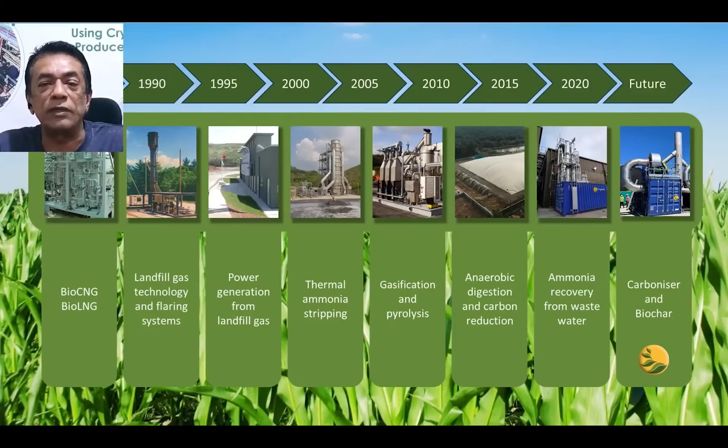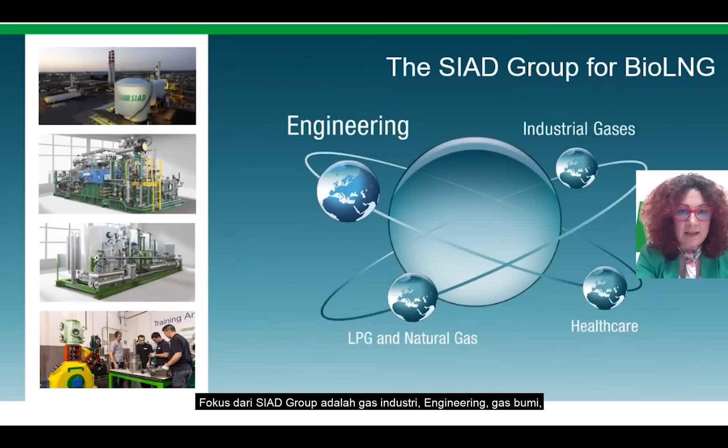And now let me introduce our company. SIAD Group has been active for almost 100 years in Europe and all over the world, and it's one of the most important industrial chemical gas companies in Italy. The focus of SIAD Group is industrial gases, engineering, LPG, natural gas, and healthcare. In 2023, last year, we reached 1 billion turnover with more than 2,000 employees.

And 1/4 of the turnover was covered by the engineering group.

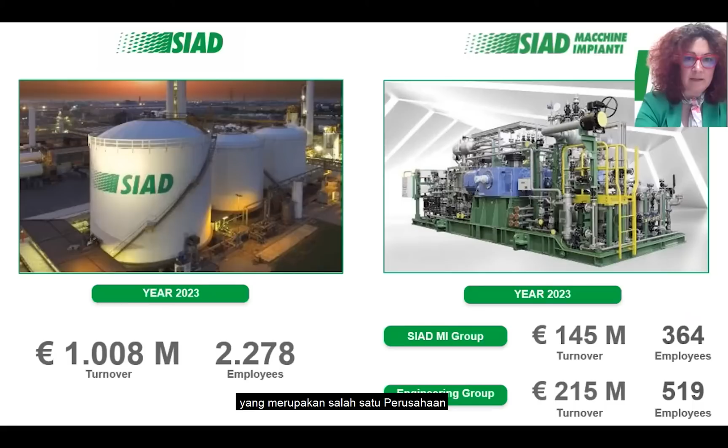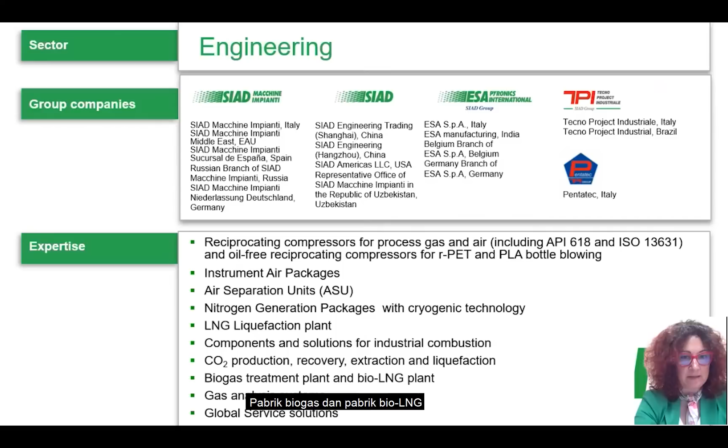SIAD Macchine Impianti Group, the engineering company of SIAD Group, is one of the main engineering companies covering the engineering business. The main products of SIAD Macchine Impianti are those indicated here, among them reciprocating compressors, instrument air packages, separation units, nitrogen generation packages with cryogenic technology, LNG liquefaction plants, CO2 production, recovery, extraction and liquefaction, biogas treatment plants and bio-LNG plants, and global service solutions for all the indicated products.

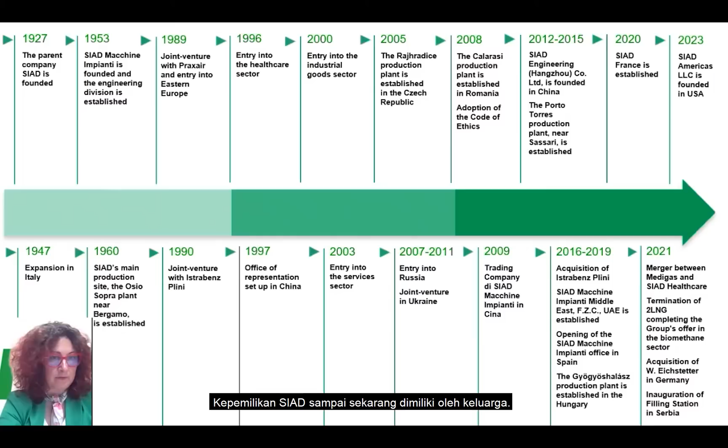Let me introduce to you some key facts important for the SIAD foundation and development. In 1927, the parent group SIAD was founded by the family. The ownership of SIAD is up to now of the family. In 1953, SIAD Macchine Impianti, the engineering company, was founded. In 1989, there was a very important joint venture with the American group Praxair, up to 2018 when Praxair merged with Linde.

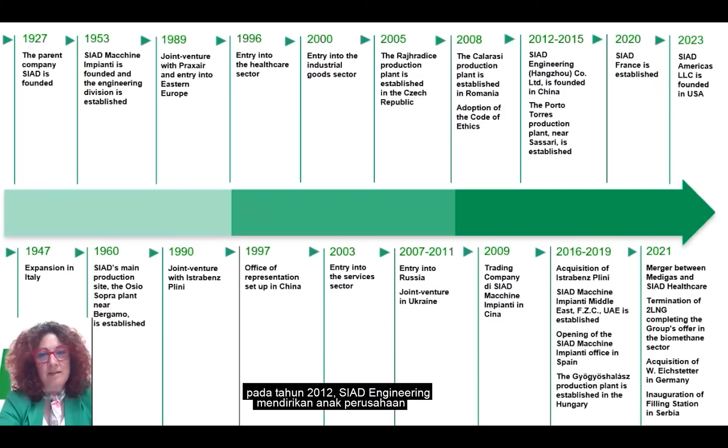In 2012, SIAD Engineering Hangzhou, our Chinese subsidiary, was founded in Hangzhou in China, and in 2023, last year, SIAD Americas LLC was founded in The Woodlands, Houston area, for approaching the American market. Our location: the headquarters is in Bergamo, close to Milan.

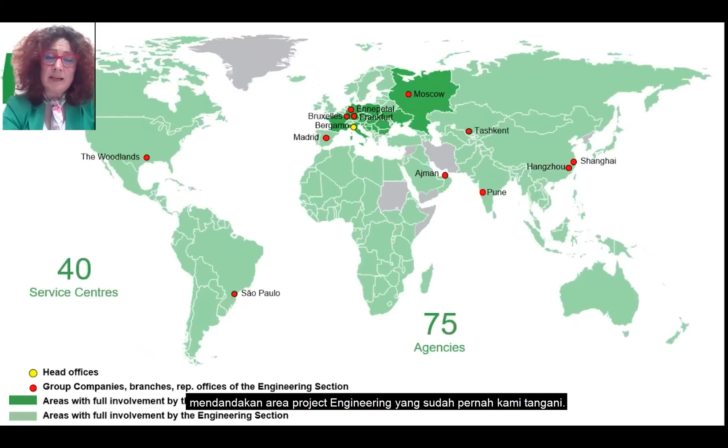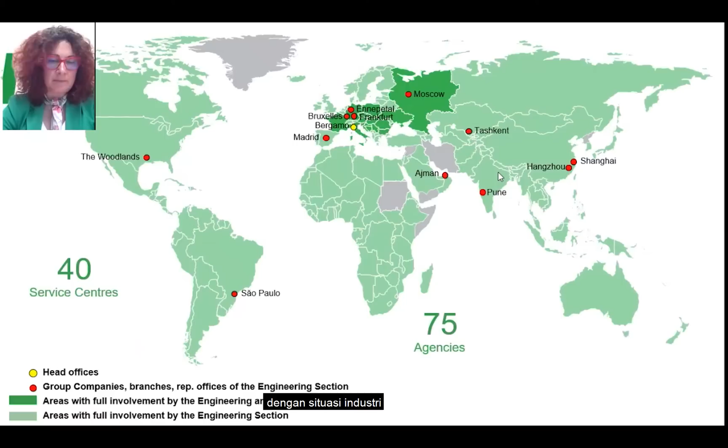And here an overview of our presence in the world. In dark green, you can see the presence of gas operations, so industrial gases, and in light green, the countries covered by the engineering, so all the products sold all over the world. With industrial gases, engineering, and our subsidiaries or branches, we can cover all the world. Here you can see, for example, our subsidiary in Hangzhou in China, our branch in Pune, our service center in Ajman, and here our headquarters in Bergamo.

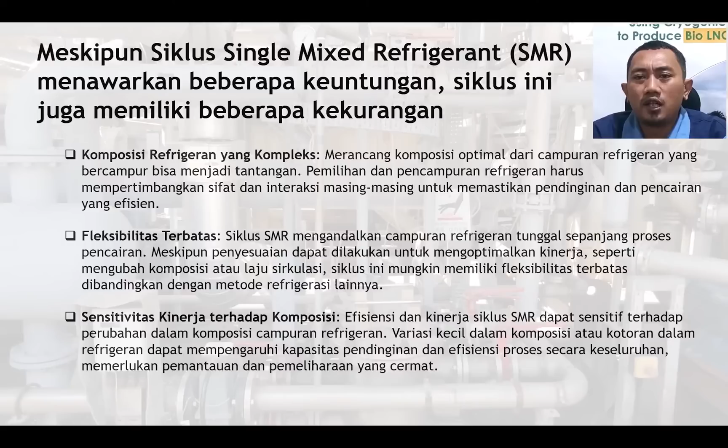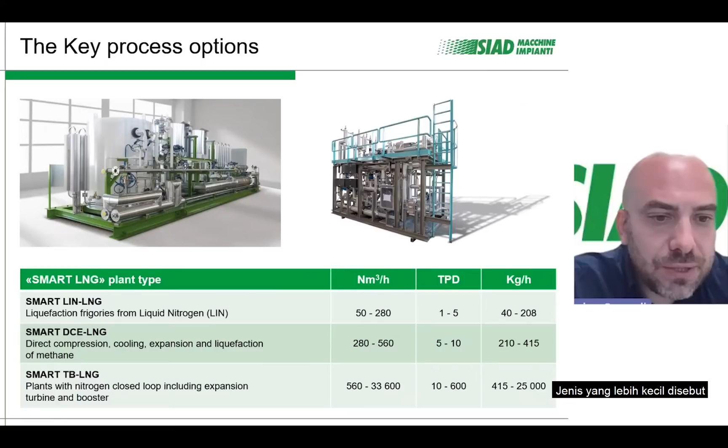SIAD Macchine Impianti can produce typically three sizes of different liquefaction plants. The smallest size is called the Smart LIN-LNG. The tonnage goes from 1 to 5 tons per day. The middle size is called Smart DCE LNG, which is based on the direct compression and expansion cycle. And the last size, from 10 tons per day up to 600, is the Smart TB LNG, based on the Brayton-Joule cycle.

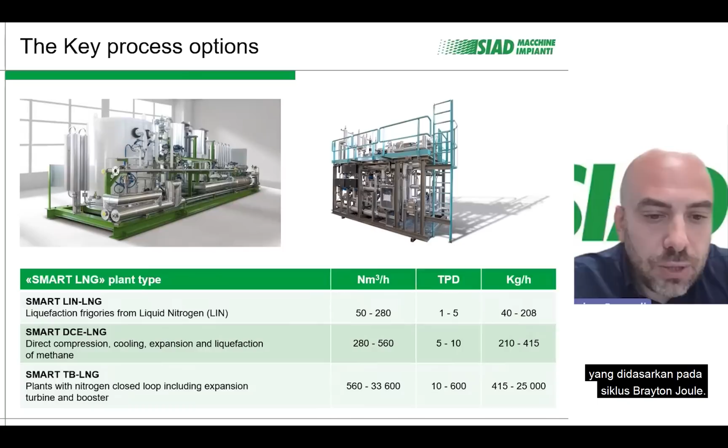The reason why the company chose to move in this direction, to the LNG market, is driven by environmental purposes. The aim is to reduce CO2 emissions in the atmosphere. This can be done by improving the market of LNG, in particular for heavy road vehicles. LNG finds great application in industrial and civil applications, in particular in remote areas and small towns. It is used as fuel in ships, trains, and airplanes, and for heavy road vehicles like freight trucks and buses. It can also be used for peak shaving in energy demand.

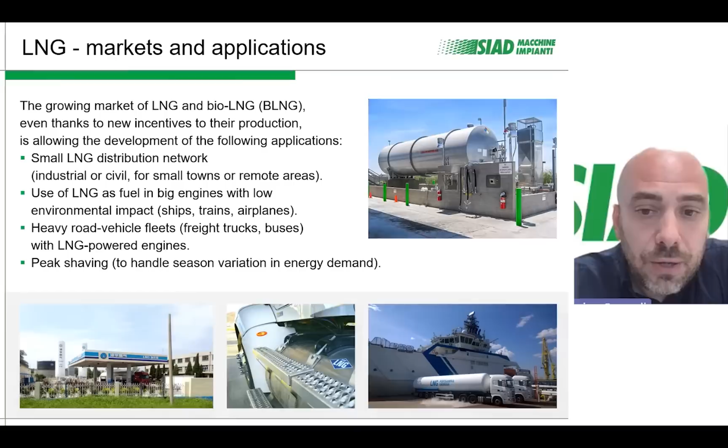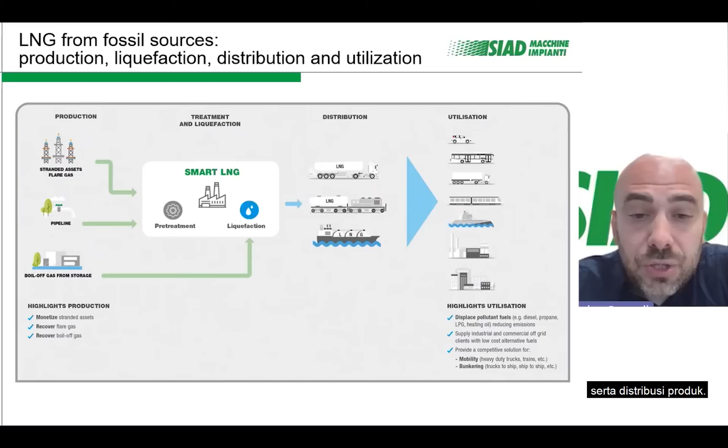Normally, SIAD Macchine Impianti can produce pretreatment and liquefaction plants where the feed gas comes from flare gases, from the pipeline, from boil-off gas storage, or biogas. SIAD Macchine Impianti can take charge of the pretreatment, the liquefaction of the feed gas, and all the utility services necessary to run this kind of plant, like instrument air, nitrogen generation, steam generation, and nitrogen supply. The distribution of the liquid product can be done through trucks or vessels.

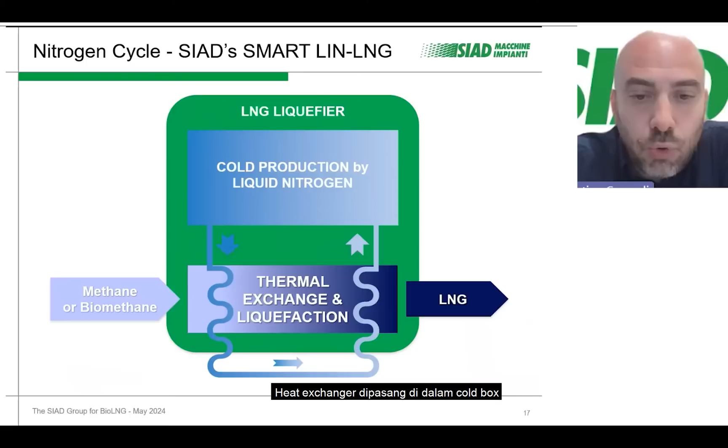The Smart LIN-LNG technology is based on nitrogen evaporation from a liquid nitrogen storage tank. The specific consumption is very, very low in terms of electric consumption. The principle is very simple: using liquid nitrogen at a cryogenic temperature, it liquefies the feed gas inside plate fin heat exchangers. The heat exchanger is installed inside a cold box in order to increase the thermal efficiency.

The typical layout of this technology is very simple. Everything is skid based and skid mounted. So we have the CO2 adsorption unit and the liquefaction plant, everything installed on one single package. Normally upstream of this package, when the CO2 content is over 5000 ppm, it is necessary to install an upgrading system with amine, or for this kind of site, normally membrane technology. Downstream of this package, a storage tank with the truck filling pump is installed.

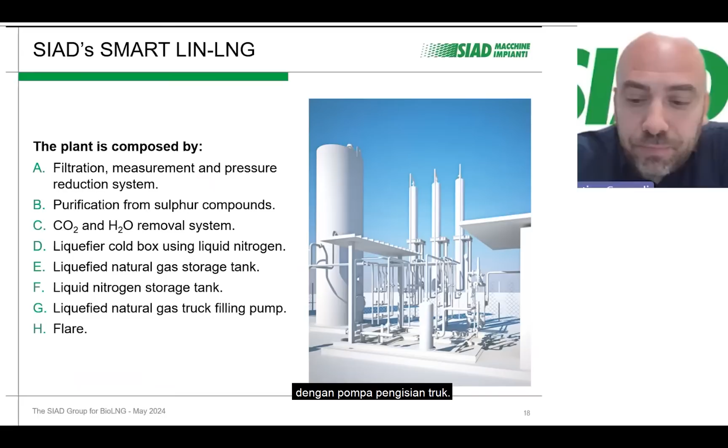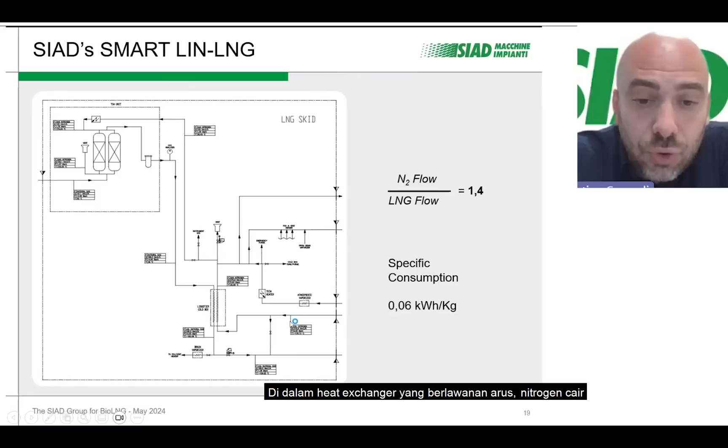The process flow diagram, as we can see, is very, very simple. Everything you see on this PFD is installed on the same carbon steel base plate. So we have the TSA technology, which removes the CO2 content from the feed gas, from the maximum of 5000 ppm down to 50 ppm, in order to avoid freezing phenomena inside the heat exchanger. Inside the heat exchanger, countercurrent, the liquid nitrogen cools down the feed gas in order to produce the LNG.

The vaporized nitrogen is used as a regeneration gas inside the TSA. The specific consumption in terms of electric consumption is very, very low, because the only two electric utilities are related to the heater for the nitrogen vaporization and the regeneration heater in order to heat up the regeneration gas, again nitrogen.

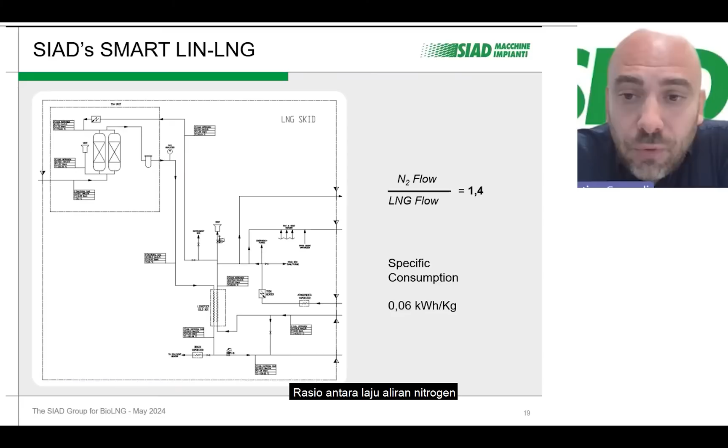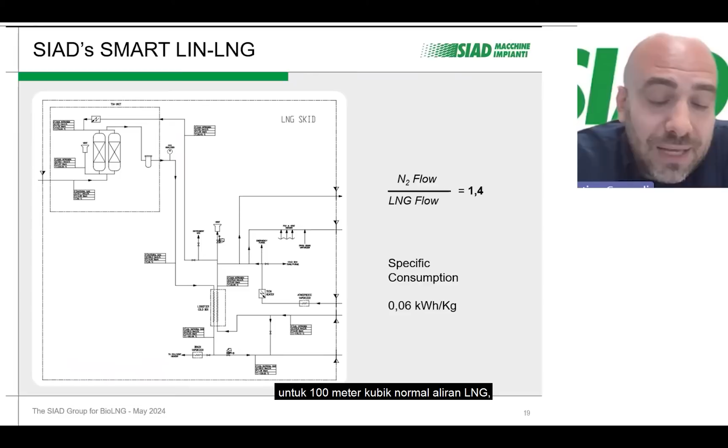The ratio between the nitrogen flow rate and the LNG flow rate is from 1.2 up to 1.4. So we can say that for 100 normal cubic meters of LNG flow, we need 140 normal cubic meters of liquid nitrogen. As we can see from these pictures, everything is installed on one single package for very quick commissioning activities.

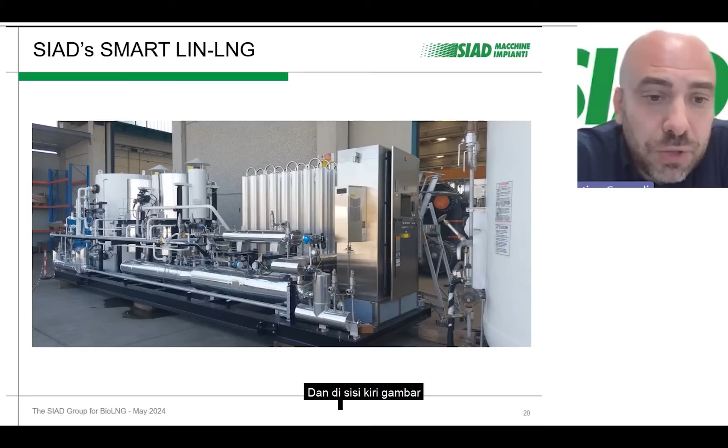We can see on the right of the pictures the HMI system. Then we can see the atmospheric vaporizer for nitrogen vaporization. Then there are the 2 TSA pressure vessel beds, and on the left side of the pictures we can see the cold box with the heat exchangers inside.

My colleague Gennaro: within the SIAD Macchine Impianti LNG technology portfolio, there is also this so-called Joule-Thomson expansion cycle, which is actually an addition to the Smart LIN-LNG that we have seen previously, which basically uses the liquid nitrogen as the refrigerant fluid in order to cool down and liquefy the natural gas from different streams, in this case biomethane.

So basically, the Joule-Thomson expansion cycle, which is also known as the Linde cycle, is based on 3 different steps: compression, cooling, and expansion into a lamination valve, also known as the Joule-Thomson effect. In this case, the methane or biomethane stream itself works as the refrigerant fluid and actually allows reducing the electrical consumption, and there is no need for an external refrigerant fluid, for example, mixed refrigerant.

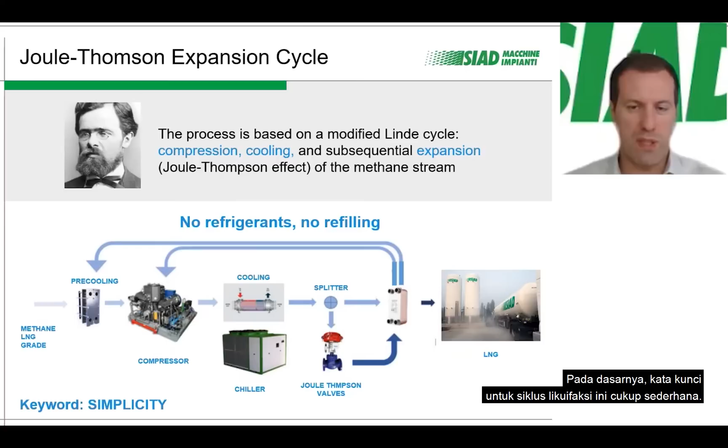Here in the bottom of the slide, we see what this liquefaction technology stands for. So we have as feed gas methane or biomethane, of course, that must be very pure in order to be liquefied. Pre-cooling, compressors, chiller, and Joule-Thomson valve, and of course, at the end of the stream, we have the storage of the LNG. Basically, the keyword for this liquefaction cycle is simplicity.

The SIAD Smart JT LNG technology basically stands for a capacity range between 5 and 15 tons per day through a single module, with a turndown between 60 and 100%, and a consumption depending on the gas composition and pressure, but usually in the range of 0.55 to 0.7 kilowatt hour per kilogram of LNG produced. And the standard output is 3 bar gauge and a temperature of almost -150 degrees Celsius.

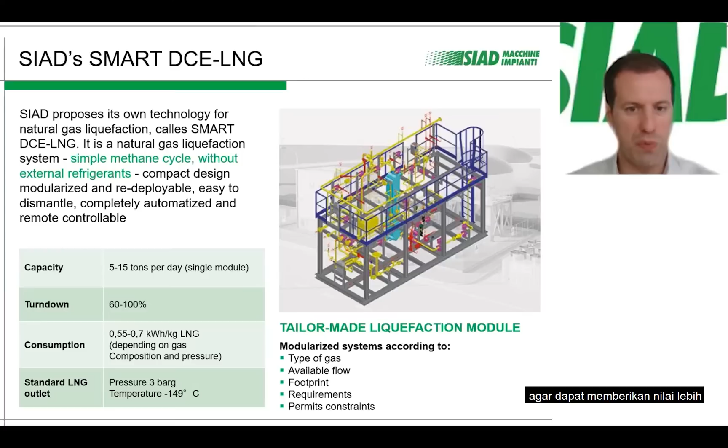There are, of course, several benefits that this kind of technology can provide to our customers, especially when it comes to providing a liquefaction module according to the type of gases, the available flow, footprint requirements, and permit constraints. Those are basically all the topics that we can easily address in order to provide our customers better value for their own customers' needs.

In these slides, we have basically summarized the key benefits when it comes to Linde cycle liquefaction technology. So basically, SIAD Smart JT LNG plants are very easy because there is no cooling fluid for the cryogenics, and they are basically composed of very well-known and simple equipment: compressors, exchangers, and valves.

It's adjustable because the LNG output can be easily adjusted according to the usage need. It's flexible because the turndown is between 60 and 100% and it can accept different inlet gas compositions. Of course, in all those cases, the gas must be as pure as possible. Available because the plant can run more than 8,500 hours a year without any stops of operation.

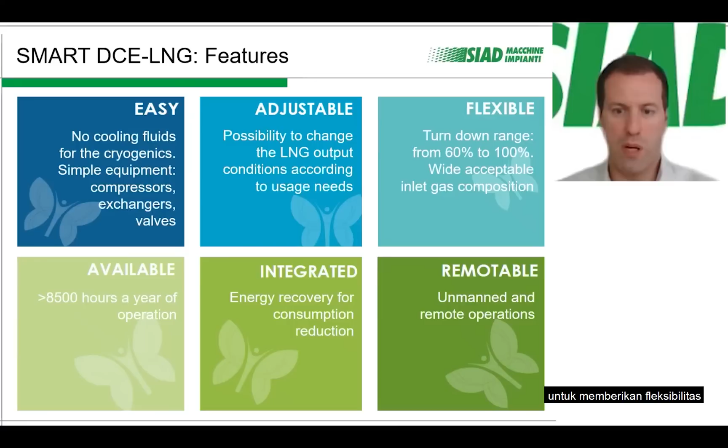Integrated because our plants are designed to recover energy in order to reduce consumption, and remotable because all our plants are unmanned and suitable for remote operation. Also, all the plants are deployable. That means that we can quite easily transfer a liquefaction module from one site to another in order to provide flexibility for our customers' needs.

If we want to make a comparison between the technologies, here we can compare the Smart LIN, Smart DCE, the Linde cycle, and the Stirling cycle, and we can make a quick analysis in terms of capex and specific consumption.

As we can see, in the Smart LIN technology, SIAD has a very, very low consumption because the main consumption is the nitrogen consumption. The only electrical consumption, let me say, is related to the steam, to the vaporizers, to the electrical vaporizers. In the Smart DCE, the consumption is related to the machine, to the reciprocating machine that compresses the feed gas.

Then we have the Linde cycle, which is absolutely similar to our Smart DCE cycle. And in the end, we have the Stirling process. As we can see, the Stirling process has a very high specific consumption compared to the Smart DCE and the Linde cycle. And when we say very high, we mean plus 35% in terms of kilowatt-hour per kilogram.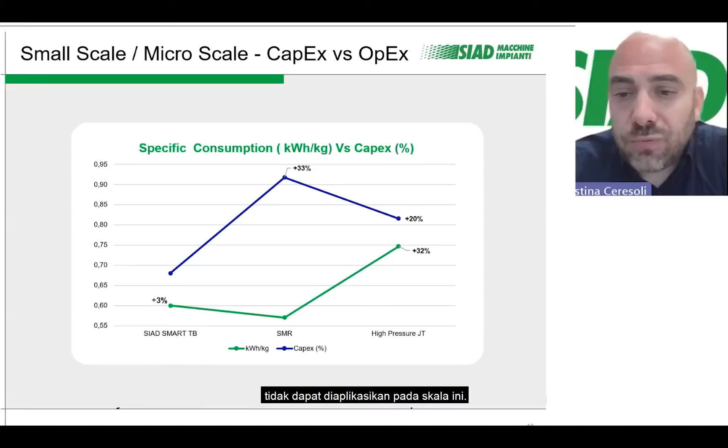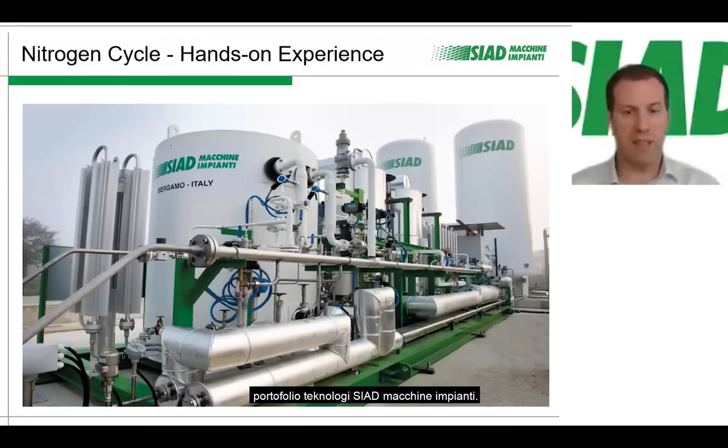In this section of the webinar, we are pleased to introduce you to some references of ours belonging to the SIAD Macchine Impianti technology portfolio. I will start with the nitrogen cycle liquefaction technology, where basically the liquid nitrogen acts as a refrigerant fluid in order to give the frigories to the natural gas stream, I mean biomethane, in order to cool down the biomethane and finally get the LNG.

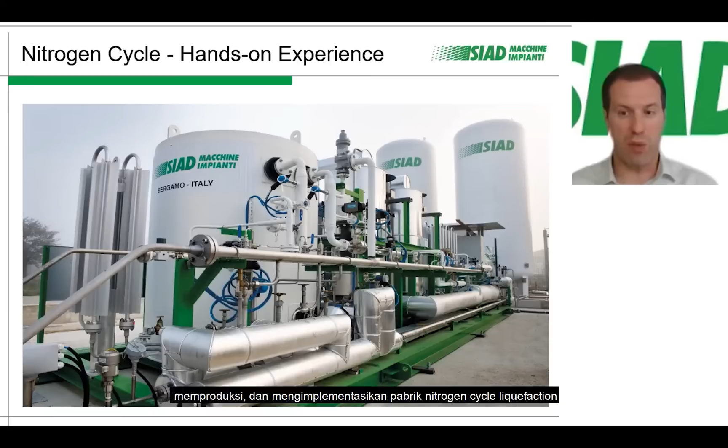The video that I'm about to show you basically represents references that we achieved in the north of Italy, where we have basically designed, developed, manufactured and deployed a nitrogen cycle liquefaction plant in a modular way. Please enjoy the video.

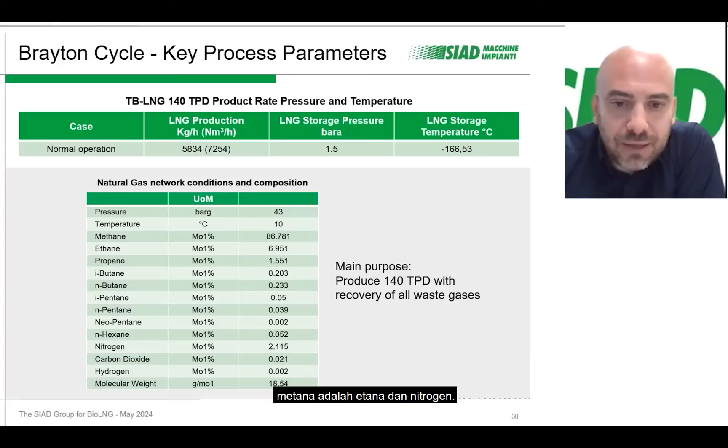The case study presented in this slide refers to an LNG liquefaction plant from grid installed in Northern Europe. In this case, the size of the plant is 140 tons of LNG per day. The LNG storage pressure is 1.5 bar absolute at minus 166 Celsius degrees. The composition of the feed gas is shown in this slide, and as you can see, the highest components, except methane, are ethane and nitrogen.

The key equipment for the natural gas circuit in this kind of plant is the filtration, measurement, and pressure reduction system, purification from sulfur compounds, CO2 and water removal package, liquefier cold box, the storage tank, the truck filling pump, and filling station. In addition, we installed the hot flare, used only for maintenance purposes, the cold flare, which is an atmospheric vent used only for emergency purposes, the regenerative thermal oxidizer, which is necessary to burn at high temperature the heavy

hydrocarbons present in the feed gas, the regeneration gas compressor, which takes the regeneration gas in the amine cycle, which is a booster upstream the pretreatment package, and the BOG compressor, which takes the BOG coming from the LNG storage tank and the truck loading bay, which is processed again inside the liquefaction process.

In this particular case, we also supplied the instrument air generation package and the demi-water generation package, necessary to give demineralized water to the steam boiler package, because the steam in this case is necessary for the stripping of the amine. In addition, we have the recycle nitrogen compressor, the turbo expander, warm and cold side, the liquid nitrogen storage tank, the nitrogen air cooler, the complete closed water loop circuit, and the analyzing system.

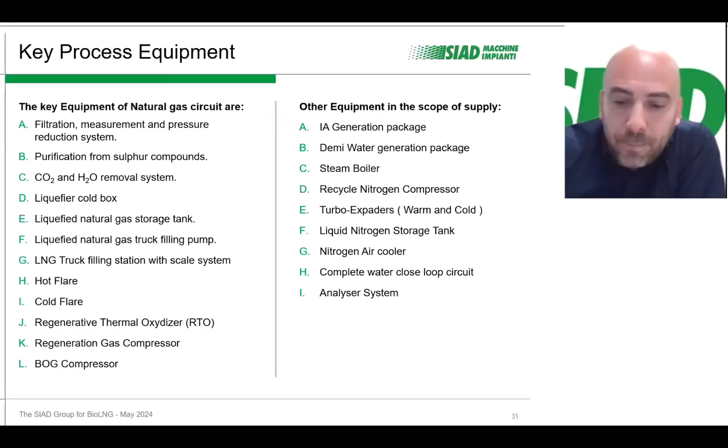The specific consumption of this site is 0.53 kilowatt hour per kilogram. We can see that the recycled compressor consumption is 3 megawatt. The turbo expander is 10 kilowatt because it's just related to the oil pump, and the CO2 and water removal system is 72 kilowatt, which is related to the electric heater on the process.

In particular, we have a very low nitrogen consumption, just 200 normal cubic meter for the purging of the sealing of the machine. The only water consumption we have is due to the demi-water package, which is 0.5 cubic meter per hour, and the instrument air production is 200 normal cubic meter.

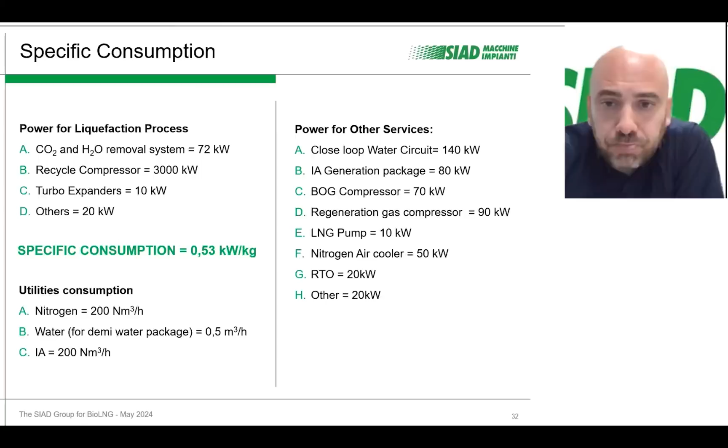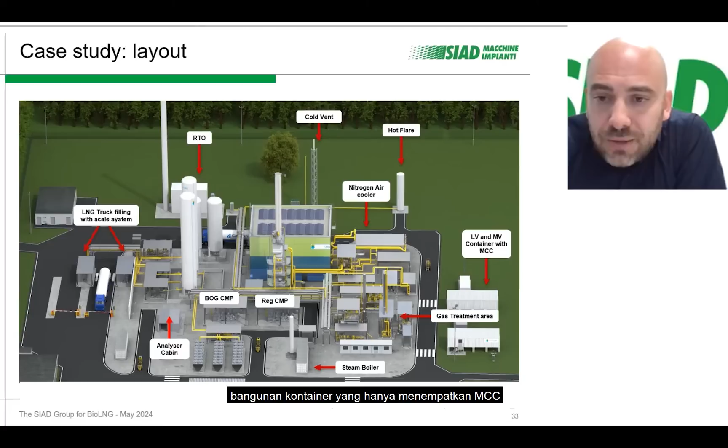The layout of this plant is this one. As we can see on the right side of the area, we can see the two buildings, two containers, where are located the MCC and the low voltage panels. Just beside this area, we have the pre-treatment area with the two high columns.

We can see the CO2 absorption column and the amine stripping column. Just in the north, we can see the nitrogen air cooler, and in the building is installed the warm and cold turbo expander and the recycled compressor. In particular, on the top of the pictures, we can see the hot flare, the cold vent, and the thermal oxidizer.

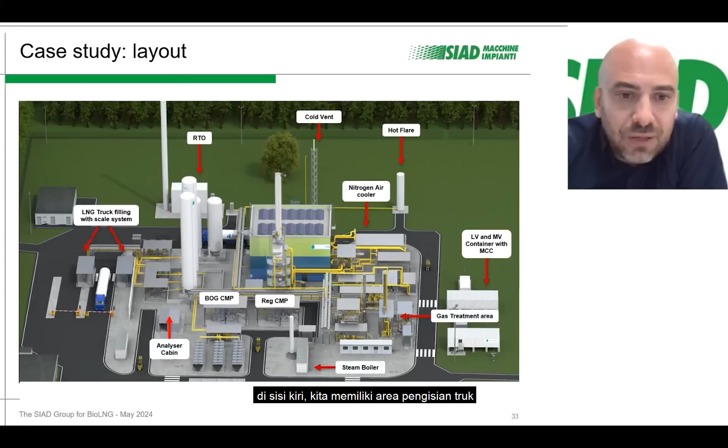In the center of the pictures, we can see under two shelters the BOG compressor and the regeneration gas compressor. On the left side, we can appreciate the two vertical storage tanks. Then we have the analyzer cabin, and on the left side, we have the truck loading bay with the scale system and the related weigh bridge.

Here there is a snapshot of the cold box and the LNG storage tank. In this case, the cold box is 35 meters high, and the tank is more or less 25 meters. As we can see, we have all the necessary ladders and platforms in order to carry out all the necessary maintenance activities on the cold box.

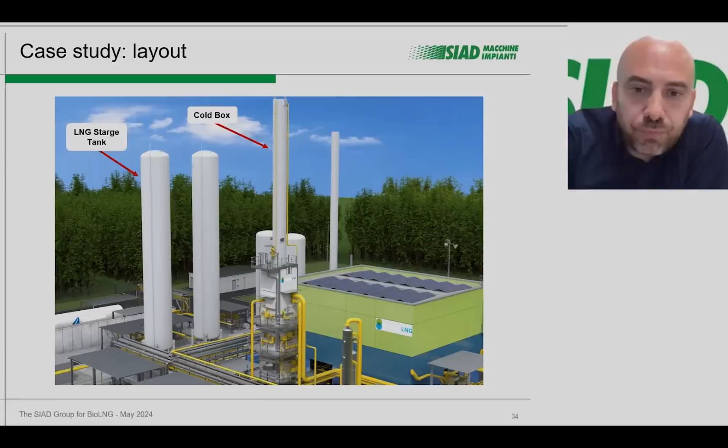Beside the nitrogen cycle, SIAD Macchine Impianti is a leading solution provider for further natural gas liquefaction technologies, including the so-called Smart DC LNG, which basically stands for a modified cycle comprising compression, pre-cooling, and liquefaction. The video I am about to show you will take you on a deeper dive into a solution we have deployed in the north of Europe, starting from biomethane as a feedstock.

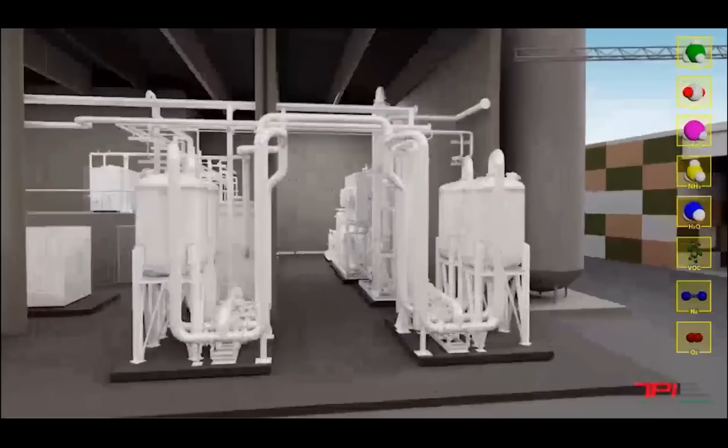Enjoy the video. The process begins in a wash tower, where ammonia and residual water are removed. Then, activated carbon filters remove the hydrogen sulfide and the volatile organic compounds.

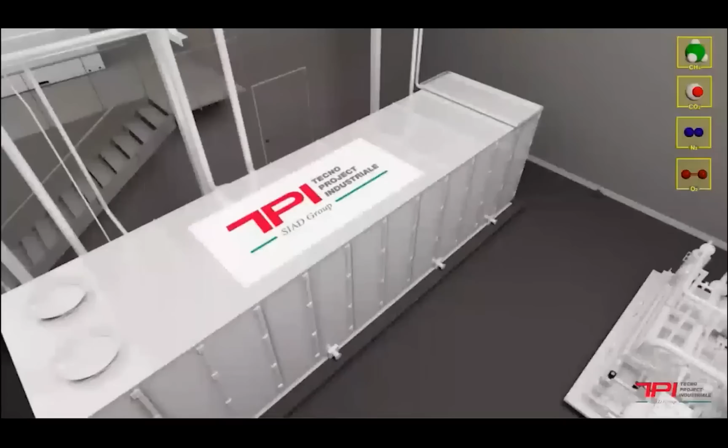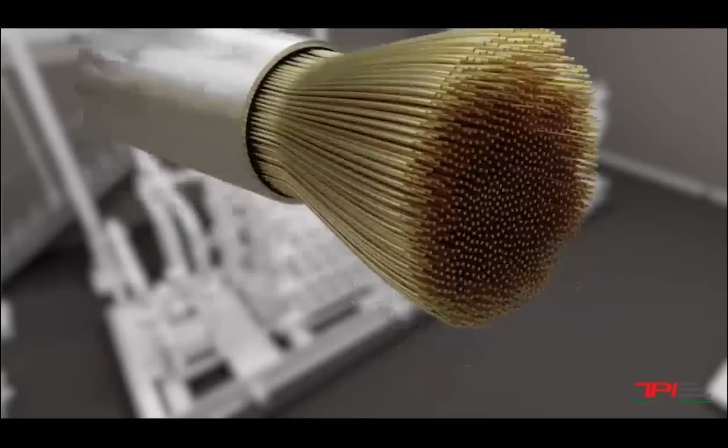Finally, it's the carbon dioxide that must be separated from methane. It is the upgrading process. A system of polymeric membranes with high refinement selectivity separates the two principal compounds. The high-pressure system involves a three-stage process patented by Evonik. In the first stage, a methane-rich gas is obtained and sent to a second stage for further purification.

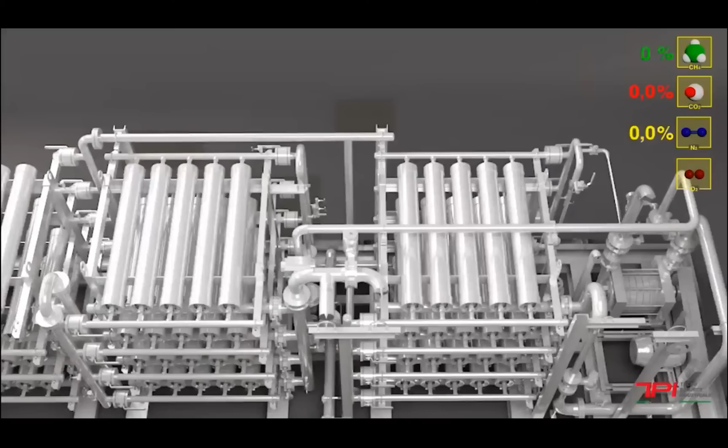The other part of the gas, rich in CO2, proceeds to the third stage to be concentrated and sent to the liquid CO2 production plant. At this point, the percentage of biomethane has increased to more than 97%. But this is not enough.

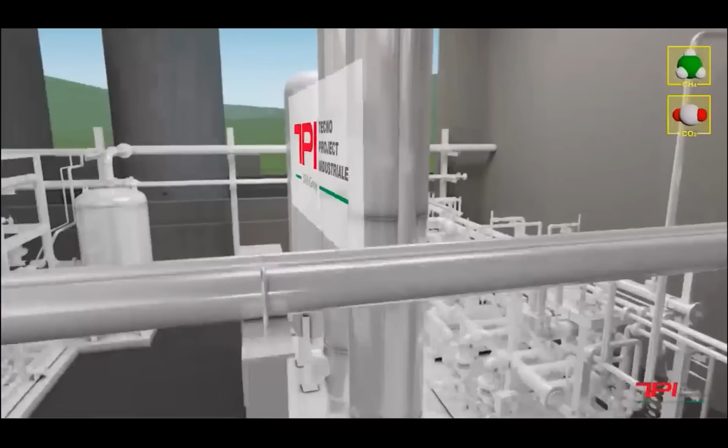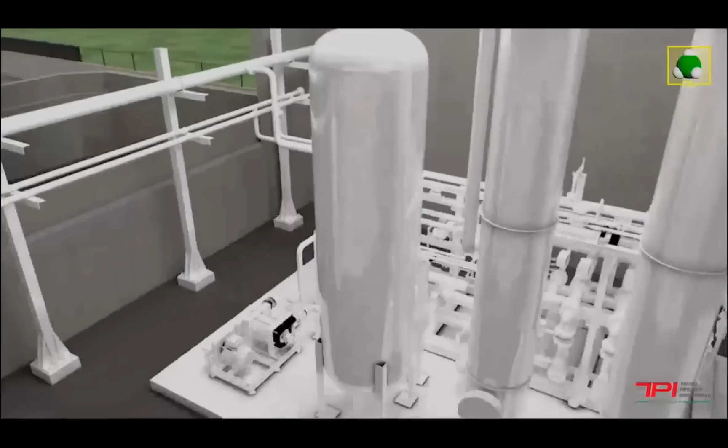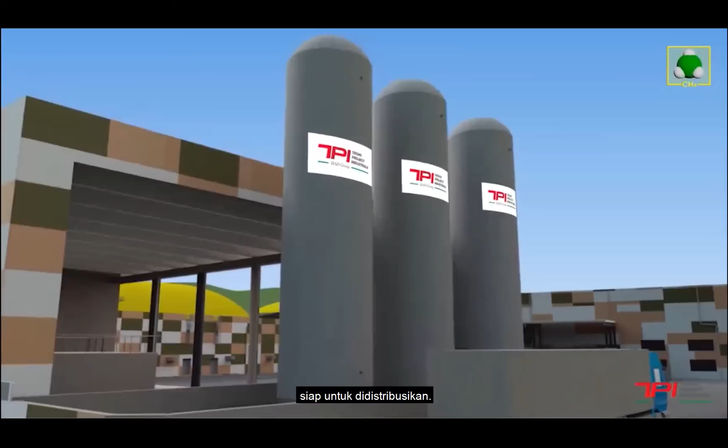To be liquefied, the biomethane needs further purification to remove the last traces of CO2. Liquefaction occurs by compressing and cooling the biomethane until it reaches a temperature of minus 150 degrees Celsius. At the end of this process, the liquefied biomethane is expanded and stored in appropriate tanks ready for distribution.

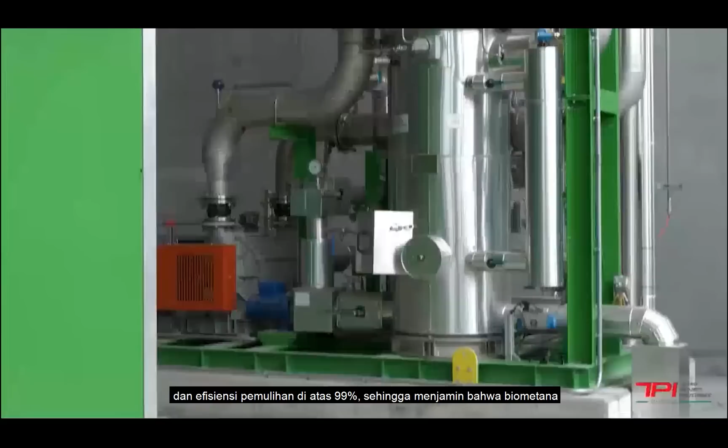The plants developed and industrialized by Tecno Project Industriale allow for high levels of purity and a recuperation efficiency above 99%, thus guaranteeing that biomethane can be distributed. Liquefying methane means reducing its volume more than 600 times, enormous savings in space for transportation and for storage.